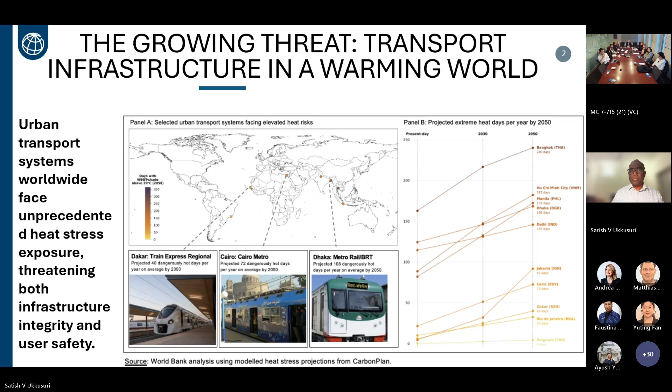So what we have done is convene an expert panel to synthesize knowledge related to heat waves. We compiled a literature review of more than 1,000 papers, reports, and blogs, and conducted more than 6 different thematic panels addressing different modal issues, looking at ways to understand both the direct and indirect impacts of heat waves, converging towards a proactive agenda for addressing heat and transport related issues.

So we synthesized various experiences related to heat waves and transport. We looked at the different types of research needs and gaps currently there, and how some cities are taking action in terms of creating awareness and priority strategies for addressing heat and transportation. Transportation isn't just about infrastructure—it's about users, including vulnerable users, and it's also about the maintenance and workforce actually using these transportation systems.

When we look at heat impacts, we need to discuss the different ways comfort is measured, and what the baseline is for temperature measurements. One is the daily maximum temperature, the thermometer temperature actually recorded. But more important is PET and the wet bulb globe temperature, which accounts not just for air temperature, but also mean radiant temperature and humidity, capturing some of the comfort related variables when looking at heat.

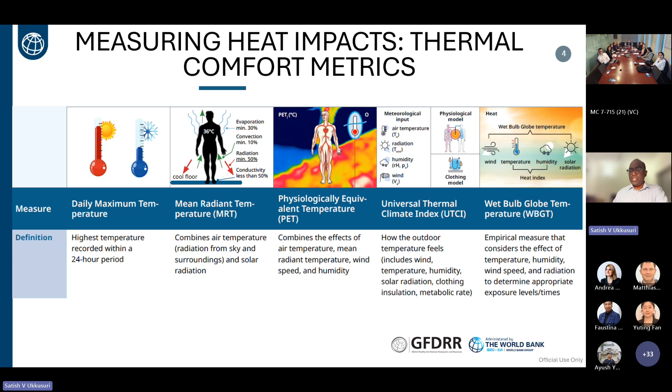It also looks at moisture, which is important when looking at maintenance of transportation systems. So we primarily look at the WBGT temperature across many of these reports in the synthesis we've done.

Moving on, looking at different impacts—both direct and indirect—and some key mitigation strategies related to each mode. The first one here is how roads are impacted due to heat stress. Some direct impacts are in terms of pavement life cycle and the increased maintenance costs, as brought up by Nicola.

What we have seen is the typical life cycle of a pavement is about 20 years. Due to increases in temperature, this could reduce to 6 to 7 years, which means it triples the maintenance cost of this infrastructure.

Typical direct impacts include rutting due to increased temperatures, and alligator cracks, which increase with every 2 degree rise in temperature and are significant in coastal areas. Then there's material degradation of both asphalt and concrete pavements, which increases maintenance costs.

Some key strategies for mitigating these impacts include better materials which can absorb some of this heat, such as thermochromic materials, biomaterials, and evapotranspirative materials, which can reflect much of this heat back into the atmosphere. Some of these are more mature in terms of implementation, while some are still in testing stages.

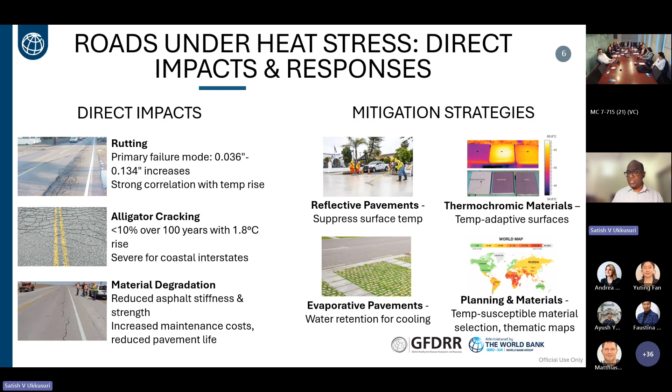Then rail heat challenges. Rail is one important mode which has seen a significant number of studies and impacts in terms of heat. Issues include buckling and track maintenance, which increases during heat wave periods.

Then there's operational impacts, primarily due to signal failures. Extreme heat causes rail signal failures and fire risk on the rail infrastructure. This has direct impacts on operations, increasing delays on the tracks and reducing train speeds, which again increases delays for passengers. So there is an issue of cascading material type issues with operational type impacts.

And then overhead systems - there is sagging of these overhead systems once it exceeds 38 degrees centigrade, causing service disruptions.

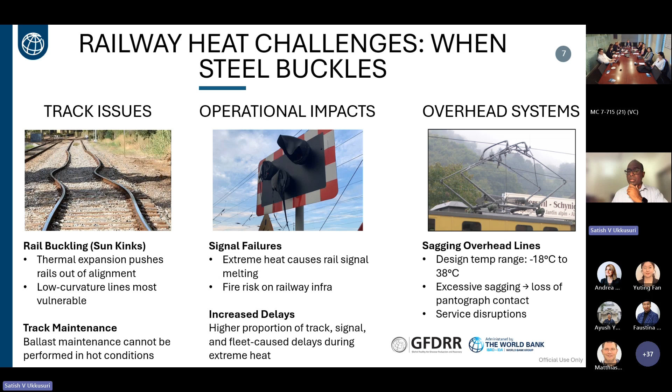Rail resilience is also important from a structural point of view. In terms of track systems, we need better IoTs and sensors so that we can track the heat and understand how to be proactive about heat stress on these tracks. And track support infrastructure needs better vegetation on embankments and heat resistant materials for overhead lines.

In terms of operations, some mitigation strategies include better implementation of heat-based speed limits, like having dynamic speed limits so that speed is adjusted based upon weather conditions.

And looking at better HVAC systems for the rolling stock, phasing out older stock and creating heat resistant components for the rolling stock in use. And having clear scheduled maintenance by having better forecasting systems so that you're ahead of these heat waves when planning your operational schedule.

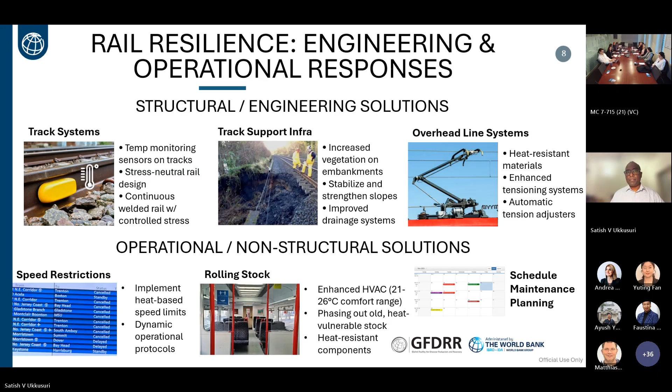In public transit systems, there are multiple levels of disruption. Direct impacts include bus fires, which we have seen in India, where tires have been blown out in some of these buses when temperatures exceed 48 degrees centigrade.

Station infrastructure not having shelters causes extreme heat stress for people using these stations. And in Europe, in the London rail system, there's trapped heat issues, increasing heat stress both for the workforce and for users of the subway systems.

There are also indirect and operational impacts in these public transit systems. We see reliability issues in terms of increased breakdown, decreased ridership as people don't want to take public transit because of the inconvenience, and switching to driving, which increases emissions.

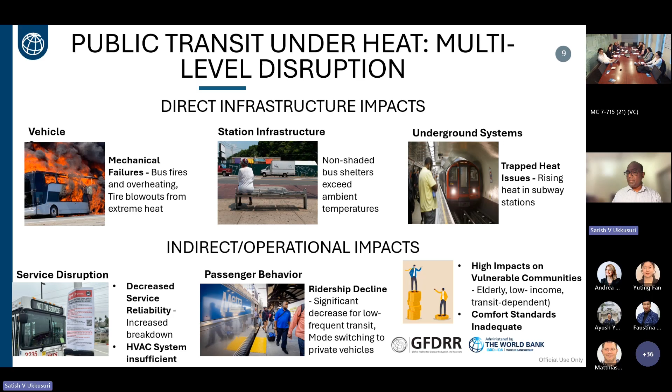And then there are high impacts on vulnerable communities. Heat doesn't affect the entire community in the same way - the vulnerable population, like the elderly and low income, actually face the brunt of it. So we need to really account for some of these comfort standards when designing these systems.

Some mitigation strategies here for public transit include better station and shelter improvements in terms of better design - one of our speakers is actually going to talk about that - renewable-powered cooling and shade infrastructure, and better HVAC upgrades and heat mitigation technologies in terms of real-time monitoring of temperatures in transit and metro stations.

And better vehicle fleet improvements using onboard HVAC systems - we've seen some of this in India and South Africa - and fleet replacement in terms of phasing out heat vulnerable stock, and better maintenance of this infrastructure. In terms of operational strategies, adjusting the schedule of these buses through better forecasting to less heat intensive time periods, and also training staff based upon heat protocols.

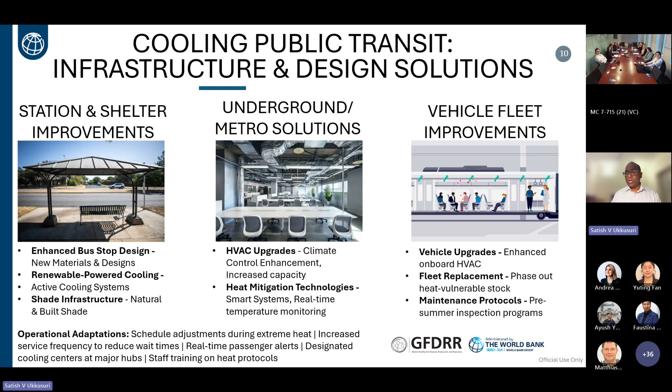These are some strategies which have been done in cities.

Active transportation - we see both pedestrians and bicyclists significantly impacted by heat waves. In addition to the direct impacts due to heat waves, we see behavioral and systemic shifts: people changing their mode of travel, shortening the travel, reducing the distances they travel, or sometimes completely abandoning these trips.

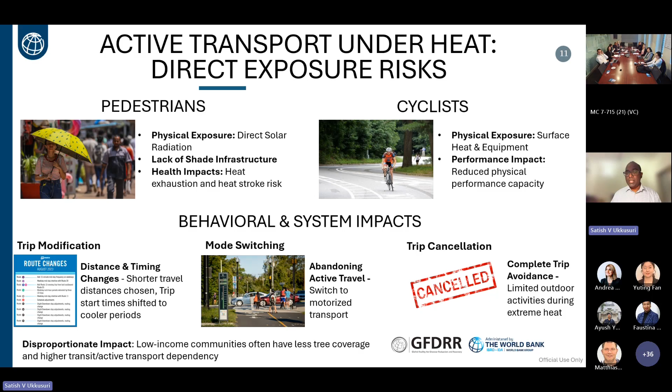And just as we discussed before, equity is an important issue here. Low-income communities often have less tree coverage and are not really suitable for active transportation type of modes.

So we have scanned cities across the globe to see what cities are actually doing in terms of heat adaptation to the transportation systems, and what strategies and actionable things these cities are doing. Here is a quick snapshot of 4 cities which are doing various types of strategies addressing heat and transport.

Singapore has been working on a 2030 plan in terms of creating more green spaces and green infrastructure, creating more accessibility to green walkways within a 10-minute walk. So their accessibility metric is that within 10 minutes, everyone should be able to access a green walkway, and using cool paints to reduce temperatures by about 2 degrees. So these are some things Singapore has been working on.

In Ahmedabad, a city in Western India, they have done some heat action plans due to a significant number of fatalities that have happened over the last 15 years. They have trained their workforce to take different types of mitigation strategies, such as providing hydration for people, cooling of police workers who are standing in or exposed to heat for very long time periods, retrofitting the transit fleet, and so on.

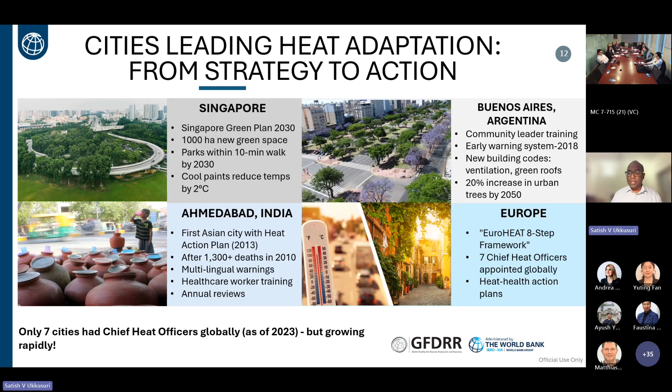This is one of our key deliverables from the issue note and the report we've come up with - a forward-looking, actionable plan of how heat resilient transport systems need to be looked at. I'll try to summarize quickly. This is a critical pathway type of approach, where a city, once they've done their baseline assessment, can take strategies depending upon their constraints and resources available, and start at whichever point makes sense for them.

There are some low-cost investment strategies many cities can do, which is to standardize heat metrics and implement certain warning systems in conjunction with identifying climate projections and investigating various types of transportation system investments. This type of baseline assessment is something we're recommending for many cities to do with respect to their transportation systems.

The next level would be to look at infrastructure investments and see how they can make their infrastructure heat resistant once they have a baseline assessment of where they are and what type of climate effects are on the transport systems. Then looking at things like green infrastructure - how can you have trees planted next to your public transportation system? We have seen cities that have planted trees on top of the public transportation system. So looking at various ways to greenify their corridors would be another infrastructure investment to consider.

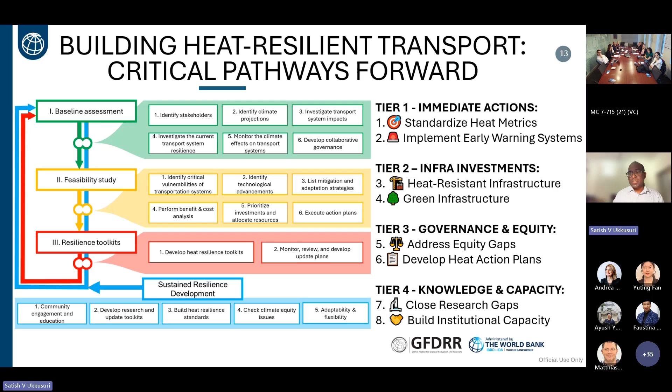At the very basic level, you can plant trees next to bus stops and plant over bus shelters. At the high end, you can retrofit your entire fleet with new HVAC systems, plant over bus shelters, and do a lot of other things in terms of adaptive pathways. These are some very concrete steps in which you could operationalize the knowledge we've put together in this framework.

I'm happy to take questions, and happy to get into more details, but this is a brief summary of what we have in the issue note. Thank you very much.

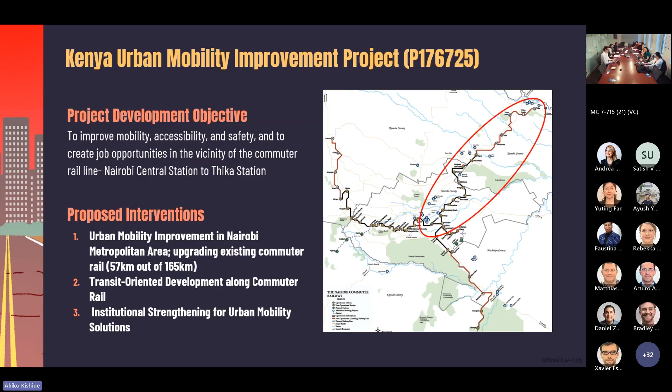However, as Professor Satish already mentioned, heat-related strain can still occur even below 50 degrees Celsius, and can happen at 30 degrees Celsius daytime temperature, because rail surfaces can exceed air temperature by 15 to 20 degrees Celsius.

Heat can negatively impact passengers' health and comfort, and railway operations. The previous presentation mentioned that heat is not well recognized compared to other risks. For Nairobi, the biggest risk is flood. However, the impact of heat is really getting more important, and we try to address this risk in the transport sector in Kenya.

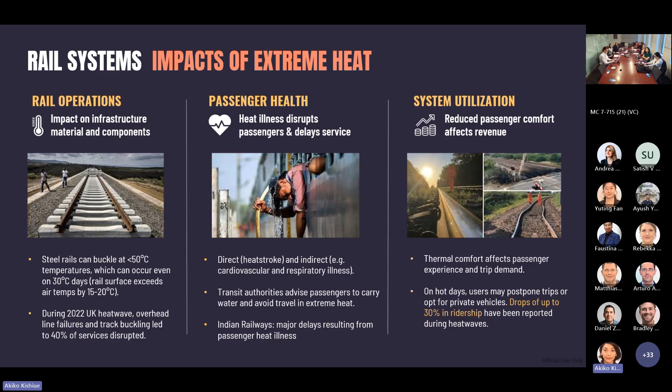So this study is to understand how the current and future heat stress conditions could affect passenger comfort, and we try to identify design options for new or upgraded stations. We also identify practical actions for heat resilient facilities.

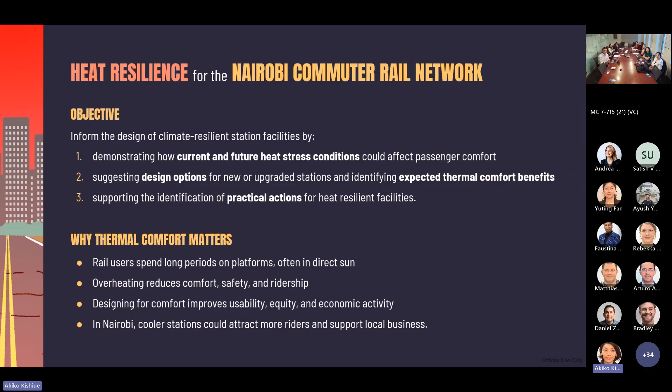First, we carried out heat analysis for the Nairobi metropolitan area where the project will take place. This analysis indicated that we will have more hot days by today's standard. For us, 30 degrees is already very hot. We also need to be ready for extremely hot days, which is 35 plus.

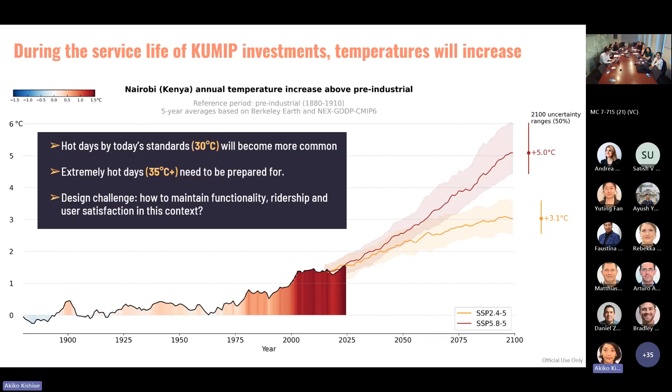This result really indicates that it is important for us to think about how rail station design can be enhanced to maintain functionality, ridership, and user satisfaction in a hotter context.

And we also checked land surface temperature along the railway line that we intend to invest. This is a Thika line of the 57 kilometer, and then the analysis basically indicated that while the temperature varies along the railway corridor, the surface temperature can be up to 10 degrees Celsius above the system-wide average.

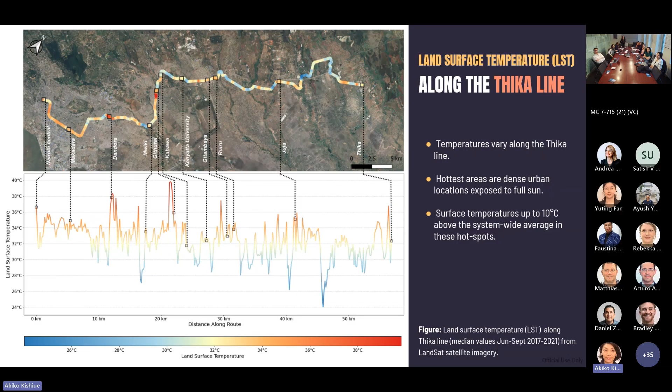So this study used the Universal Thermal Climate Index to gauge when passengers feel comfortable and when they are at risk of heat stress. Given that Nairobi is blessed with a mild climate, we slightly adjusted this index for the Nairobi context, so for us 16 to 26 degrees Celsius is considered the comfort zone. We examined 6 factors that affect outdoor comfort: air temperature, humidity, solar radiation, sky conditions, rain, and wind.

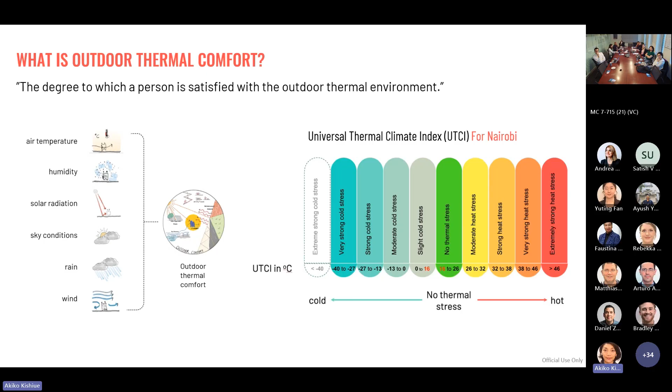We also selected the time frame relevant to traveling, so we agreed that 8 a.m. to 8 p.m. is for our analysis. The analysis indicated that currently, during daytime hours, in the fully exposed condition, half of the time temperatures fall within 16 to 26 degrees Celsius, the comfort zone.

However, based on the modeling result for 2090 under the shared socioeconomic pathway 5, the result indicated that the perceived temperature could be 5 to 7 degrees Celsius higher than today. This means that passengers waiting outdoors will increasingly face uncomfortable conditions.

And then the comfort zone will be reduced from 50 to 31%, and around 20% of the time passengers will experience very strong heat stress, which is currently only 1%. So without intervention, Nairobi's commuter rail stations could become significantly uncomfortable for passengers at key hours.

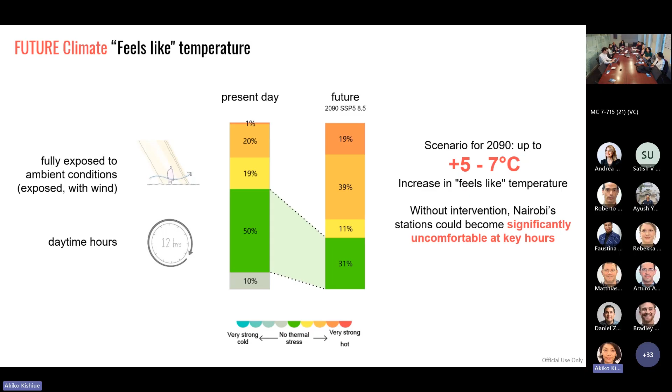So then the design strategy for thermal comfort for Nairobi Rail: 5 strategies have been identified, which are solar shading, wind access, cool materials, vegetation, and enhanced wind, for the passive cooling that can inform the design for new stations or retrofitting existing stations.

As you can see from this graph, the biggest impact will come from shade. Even a well-ventilated platform can bring only 31% of the daytime hours into comfort. But if we combine shade and wind, we can increase the comfort up to 86%.

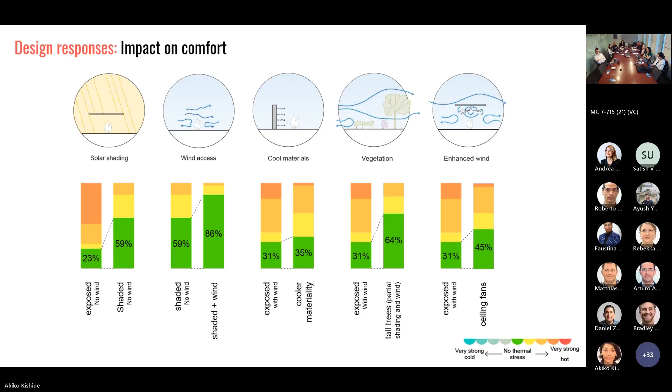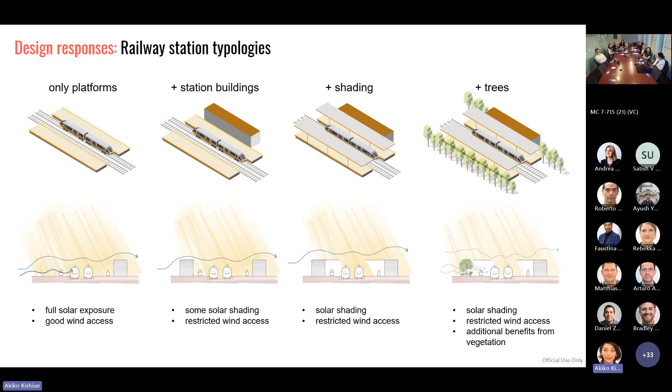We also looked at both 2 and 3 platform configurations. Here we are showing the 2 platform configuration with different conditions. We modeled the central platform assumed at 10 meters wide for the 3 platform configuration, and 5 meters for the 2 platform configuration. The model included 3 meter roof height, 5 meter roof height, and 5 meter roof plus building, which provides additional shade.

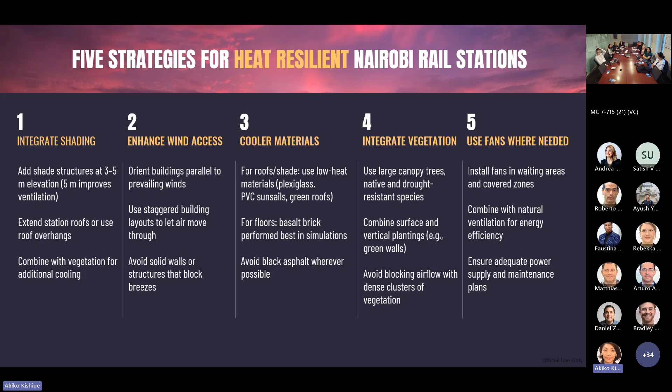And for each strategy we provided recommended actions as presented in this slide. In conclusion, thermal comfort at the railway station is not only good for passenger comfort, but also contributes to higher ridership and increased revenue, and has a positive impact on local economic activity around the stations.

And then also responding to climate resilience, what we are proposing is a set of small design choices. If that happens in the early stage of design, it can also save better on investment. Due to time constraints, I did not go into detail; this presentation is to give the overview of what we have done, but we are now discussing with the Nick's team to publish this study, so hopefully soon we can share this report for those who are interested.

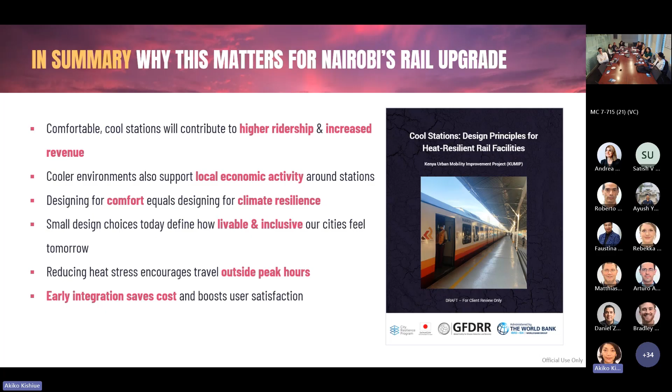Thanks to this analytical work supported by the urban heat team, I really see that the client is now designing that access road to the station, incorporating heat elements. I understand the Nick's team is available for further consultation for any team interested in this type of analysis. So anyone who has any question for the project, please reach out to me, and for heat analysis, it would be great to reach out to Nick and Nuala. Thank you very much.

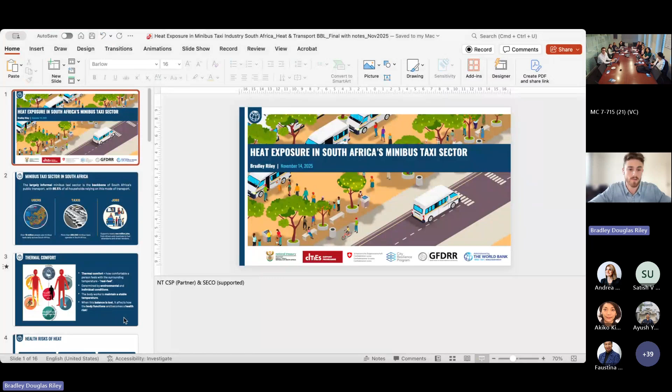So I'm Bradley Riley, a consultant with GFDRR, based in the South African office. I'll introduce some of the work we've been doing on heat exposure in South Africa's minibus taxi sector, done in partnership with the South African National Treasury City Support Program, and supported by SECO.

Just to provide some background on the minibus taxi sector in South Africa: it's a largely informal sector, but it's really the backbone of South Africa's public transport. Around two-thirds of all households rely on this mode of transport. There are over 16 million people using taxis daily, more than 280,000 minibus taxis in operation, and it supports an informal economy of nearly 1 million jobs, from drivers and marshals to fuel attendants and street vendors.

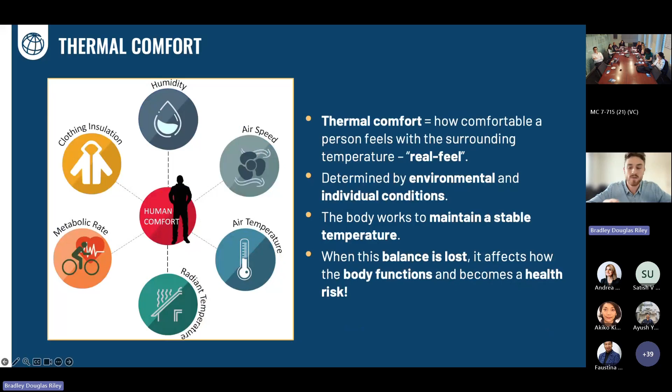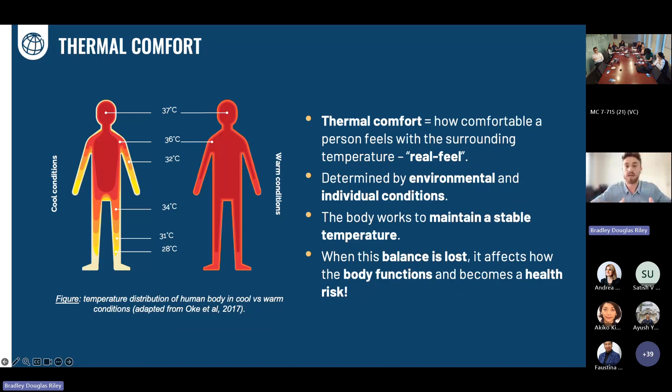I wanted to introduce the concept of thermal comfort, but the previous speakers beat me to it, so I won't touch too much on this slide. What's important to note is that our body works really hard to maintain a stable temperature. The graphic on the left shows how our body reacts to different environmental conditions. When this balance is lost, it affects how our body functions and becomes a health risk. Prolonged heat exposure can cause heat-related illnesses such as headaches, dizziness, heat exhaustion, and even heat stroke, and can worsen chronic conditions like cardiovascular and respiratory diseases.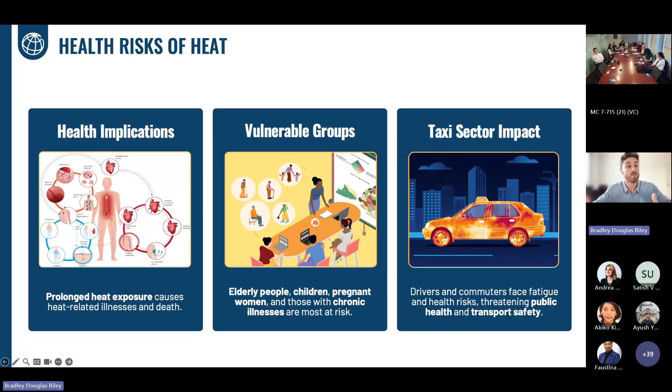Vulnerable groups most at risk include the elderly, children, and pregnant women—there's a lot of research now coming out about the risk and impacts of heat exposure on preterm birth and stillbirth. Those with chronic illnesses are also most at risk. Specifically for the taxi sector, drivers and commuters are facing fatigue and health risks daily, which ultimately threatens public health and transport safety.

This is really where our study came from, looking at heat exposure in the minibus taxi sector in the city of Durban. This work was commissioned in collaboration with the South African Medical Research Council, to understand heat exposure on drivers and commuters within this sector. So: are drivers and commuters exposed to extreme heat, and to what extent? How does heat inside taxis and taxi ranks compare to outdoor conditions? And what adaptation actions and investment options can reduce exposure?

But why does this matter? Drivers and commuters spend long hours in taxis and at taxi ranks—it's estimated that drivers spend about 10 hours a day in their vehicle. Extreme heat causes thermal discomfort, leading to heat-related health illnesses. Heat stress has also been linked to reduced concentration and performance, increasing the risk of driving errors. Designing for comfort and resilience makes the sector safer and more user-friendly. But what does that look like?

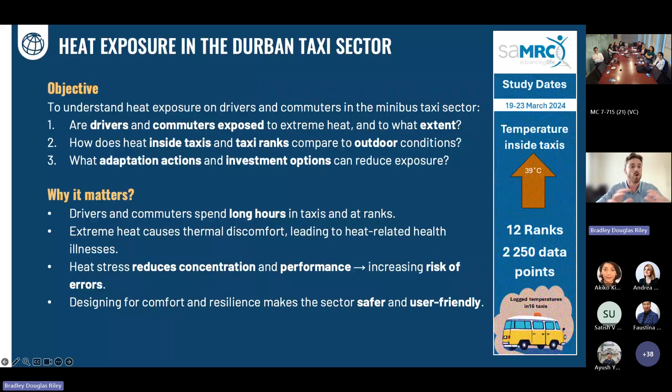This provides an overview of how the study was designed. We installed iButtons, or temperature recorders, in 16 taxis and 12 taxi ranks, measuring temperature and humidity hourly over a 5-day period. About 2,250 data points were collected and used to calculate what we call apparent temperature, or the 'real feel' temperature, which brings the temperature and humidity metrics together.

The results are quite stark from the get-go: temperatures inside the taxis and taxi ranks were consistently higher than outdoor temperatures. I'll go into a bit more detail in the next few slides.

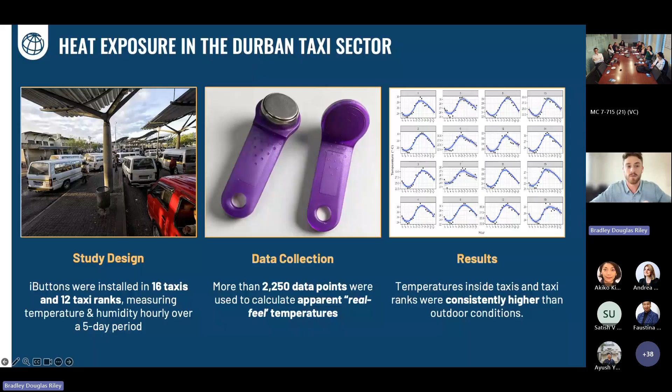This first slide looks at heat exposure inside the taxis. This graphic provides the hourly temperature measurements recorded in the 16 taxis across the 5-day period. It shows that temperature ranges were from a minimum of 24 degrees Celsius to a maximum of 39 degrees Celsius, averaging around 27 degrees, which is consistently above typical comfort levels of around 25 to 27 degrees Celsius.

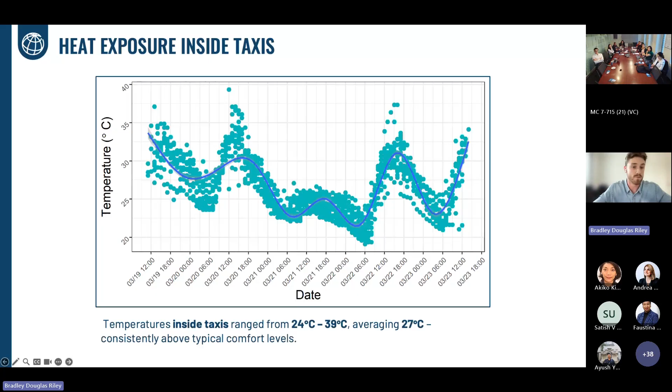We then compared heat exposure across different environments. This graphic shows the different contexts: outdoor temperature in the blue line, taxi rank temperature in the green line, and inside-taxi temperature in the red line.

And straight away, you can see that both the taxis and taxi ranks recorded hotter temperatures than outdoors. So taxi interiors averaged around 6 degrees higher, and taxi ranks averaged around 3 degrees higher. So this is really, really evident.

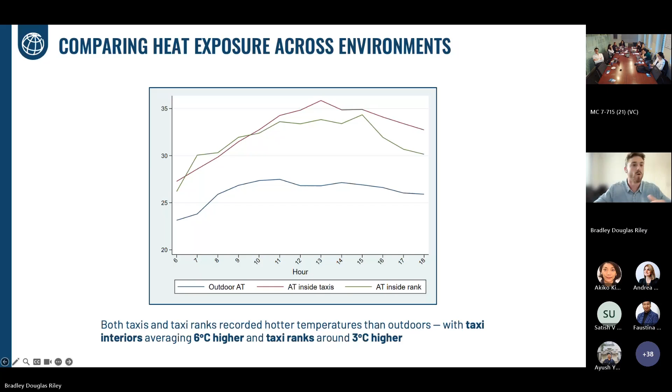But what does this mean? Inside taxis, temperatures exceeded outdoor conditions by more than 6 degrees Celsius. At taxi ranks, although slightly cooler, they still reached up to 35 degrees Celsius, with very limited shading and cooling options available. Around 70% of the observed taxi ranks and infrastructure contained heat-absorbing materials like concrete or corrugated iron surfaces, and only about 25% of these taxi ranks had any form of shelter.

This is a specific public health concern in the city of Durban, as recent studies and research have found that all-cause mortality increases significantly above the 30.6 degrees Celsius mark. This is a threshold that drivers and commuters are frequently exposed to. Adding to this, the hotter temperatures actually coincide with higher commuter volumes. So during the afternoon session, when peak commuter volumes are high, temperatures are also extremely high, and this is where the greatest discomfort and health risks are faced.

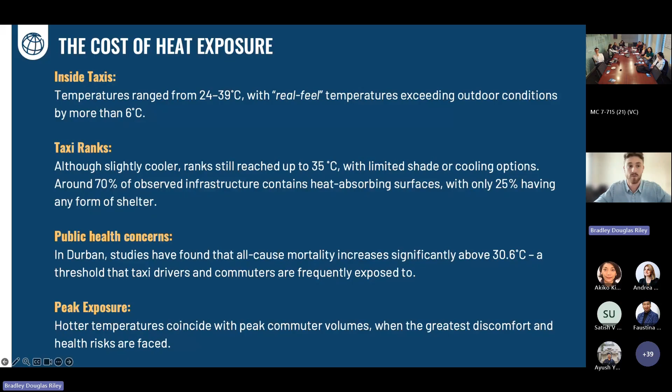In parallel to the physical data collection, we also did interviews with taxi drivers and commuters to understand how they perceive and respond to heat on a daily basis. Straight away, drivers and commuters feel significantly hotter inside the taxis. Over time and prolonged heat exposure, they feel fatigued, and specifically for drivers, there's reduced concentration, impacting driver performance and the risk of driving errors. Most of them only rely on basic coping strategies for temporary relief, like opening windows, drinking water, and parking in the shade.

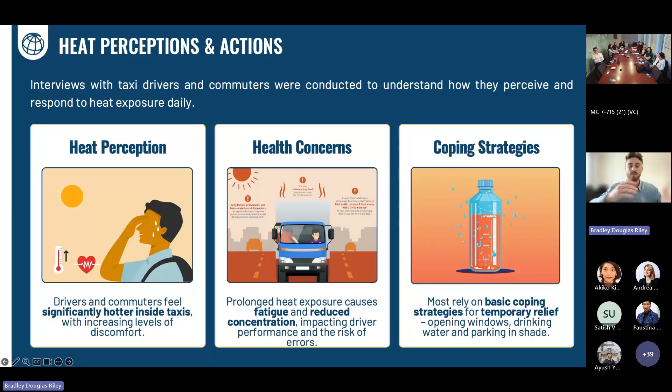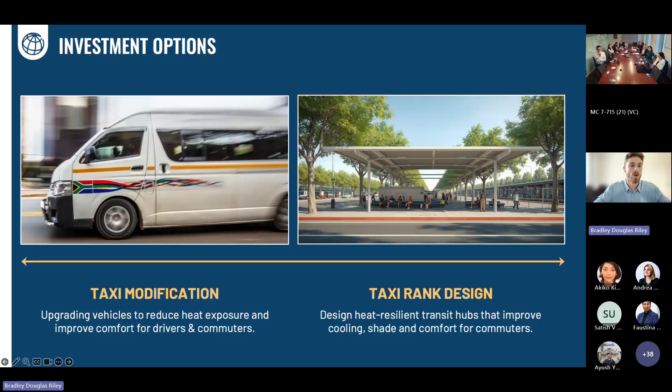Beyond this, investment options also range from vehicle modifications to the design of heat-resilient taxi ranks—whether upgrading vehicles to reduce heat exposure or designing heat-resilient transit hubs that improve cooling, shade, and comfort for commuters. Focusing on modifications for taxis, the first one that came out was engine repositioning.

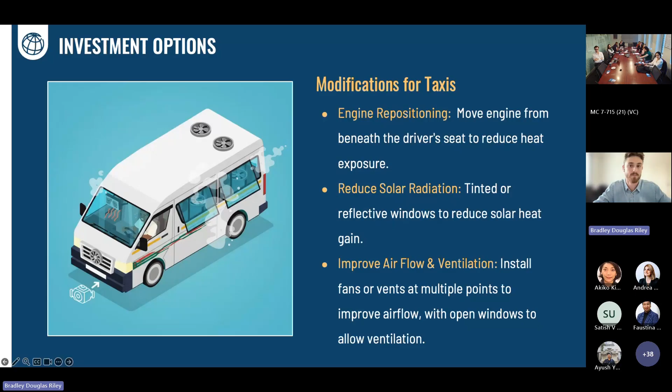Currently the engine sits beneath the driver's seat, so there's a lot of radiation coming up from below. The idea is to move the engine and redesign and modify the taxis to reduce that heat burden. Reducing solar radiation, whether through tinting windows or using reflective windows to reduce solar heat gain. And then improving airflow and ventilation through installing fans or vents at multiple points, with open windows to allow ventilation. Then moving towards design options for the taxi ranks.

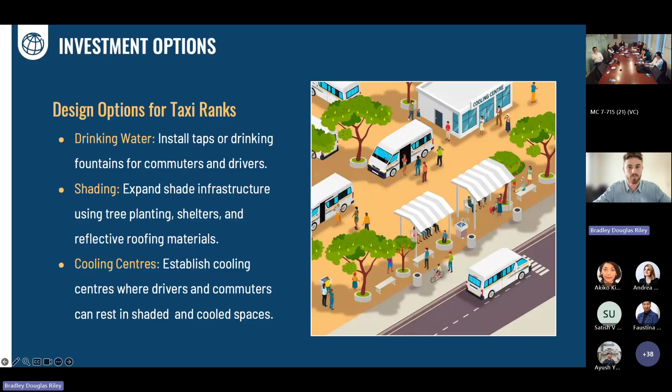Ultimately, it's a call for action to build a cooler and safer taxi sector. Cooler, safer taxis mean healthier drivers and commuters and more comfortable journeys. Simple vehicle upgrades can reduce heat stress. Shaded and cool taxi ranks create more livable and user-friendly public spaces. Clear communication and awareness can really empower and drive behavior change. Reducing heat stress improves productivity, concentration, and ultimately safety on the road. Investing in heat resilience is not just about comfort, but about protecting people and their livelihoods.